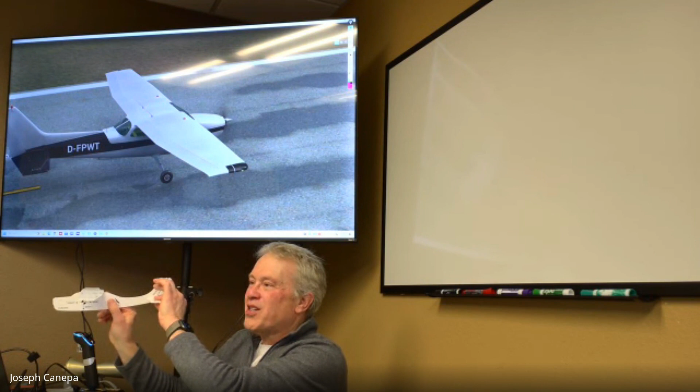What's the control? Elevator - that's what I'm looking for. The elevator is what causes the plane to turn. Remember we talked last week: when the aircraft goes into a bank, it doesn't turn just because you bank it. What causes it to turn is the elevator, which creates lift that pulls the aircraft into the turn. So when anybody asks what causes an aircraft to turn, it's always the elevator. You can also say pitch, since you're pitching into the turn, but most instructors are looking for elevator. Banking alone doesn't cause the airplane to turn - it needs a force to push it into the turn, and that's the pitch or elevator.

Let's see here. Okay, what are these that are slowly dropping down? What are those? Flaps, yep.

Hey team, how you doing?

On some aircraft, the flap actuators can be like an old style brake handle that you pull up one notch at a time. Some older aircraft have a little bar on the floor of the cockpit - you press a button and pull it up like that old style brake. I don't know if you've ever seen an old car, they have a little push button, you lift the lever up and it drops down a flap. I love those, by the way.

But a lot of the newer ones have electric switches in the cockpit. In this case, what I'm doing is holding a button down in the cockpit. Let's switch to that. So in the cockpit, the flap switch is right here - there's the flaps right there. What you do is pull that down, you can see that right there. So right now the flaps are dropping. You can see this right here, that's the flap indicator - it tells you how many degrees of flaps you have. This goes up to 40 degrees of flaps. So you put that little lever down and you can see the indicator in that yellow area. It's showing we've got 40 degrees of flaps. If you want it to go up, you just flip it up like that.

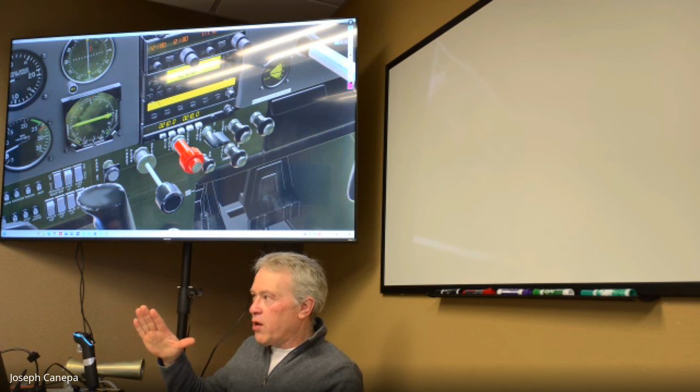These were older style electronic activated flaps. The newer ones actually have detents - a detent for 10 degrees, 20 degrees, 30, and so forth. So it's easier to drop the flap, you don't have to hold it down for a certain amount of seconds to get it there. The problem with those old flap switches is you have to count them out, whereas the newer style flaps, you just set to the position and they automatically round down to that 10, 20, 30, 40 degree position. So that's the flap switch right there. Bring that up and let's see if I go outside there. All right, so there's flaps.

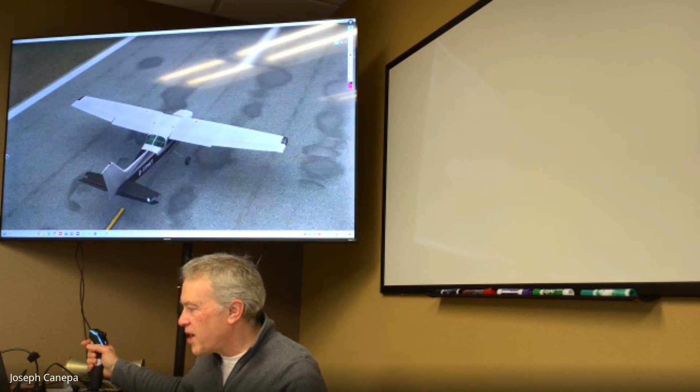And what's this? Elevator, yep. And what does that cause the plane to do? Pitch, yep. So when we pull back on it, it's going to cause the plane - let's move this down here - if I pull back like this, what is the plane going to do? It's going to pitch up and go into a climb, as long as you've got enough airspeed. And then this obviously is pitch down.

Okay, what's this surface right here? Control surface, yeah. What's that? The yaw, yeah, it controls yaw. And what is it called? Rudder, yeah, just like in a boat - same thing, you steer it one direction. This over here.

Let's go right back here. So see if I swing that way, the plane is going to yaw. So here's our plane, if I do a rudder like that, the plane is going to yaw in that direction. Yaw like that. If I do it like this, if I push on my right rudder pedals - now these are controlled by rudder pedals inside the cockpit. Let's take a look at those. I don't know if I've shown that to you before.

Right, so let's look at the rudder control yoke. These are the rudder pedals, and they look like brake pedals on a car, but there's a left one and a right one. When you push on the right one, you can see that pedal move in there. Notice how also on this plane, you've got two sets of them, one in the pilot position and one in the co-pilot position.

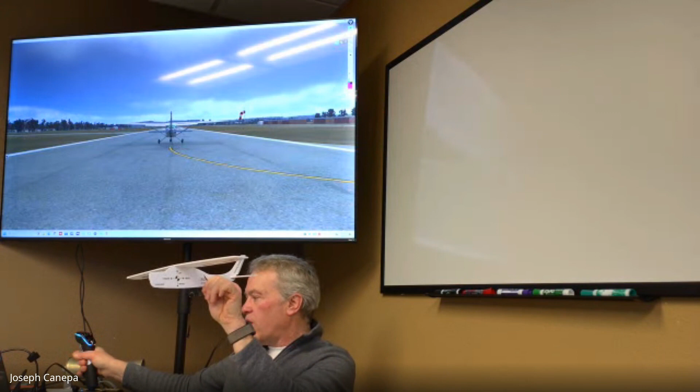So again, if I want to do right rudder, for instance, I'm going to push on that right rudder pedal. And see how the left rudder pedal comes back to do it? They're linked together. Imagine in this aircraft you've got a long cable that runs from the foot pedals up here all the way back to that rudder. It's just a loop that goes through these two rudder pedals. As you apply rudder pressure to the right rudder here, it's going to cause it to do that. So if I go outside the aircraft and hold my right rudder, you can see the rudder swinging to the right here. The other thing you'll notice about the rudder pedal, and this is true of most training aircraft, watch the nose gear.

See how it turns the nose gear right there? It's kind of hard to see this thing. Let's go to the front here. Okay, so there's our nose gear right there. So I'm just going to apply right rudder pressure. See how it turns... I don't know why it's going back and forth, something with the sim there. It's trying to turn right there. It's not staying very well. But that's a linkage from the rudder pedals here to the nose gear.

And that's so you can steer on the ground. Because obviously, when you're on the ground and you want to steer and you don't have any air flowing over your rudder, the plane's just not going to steer at all without some sort of friction on the ground. And that's what that does. There's a linkage again in the cockpit here from the rudder pedals down to this. That same linkage also goes all the way back to the rudder in the back of the plane. So that's rudder controls, and they're basically, in most training aircraft, just cables. That's all it is, cables and pulleys.

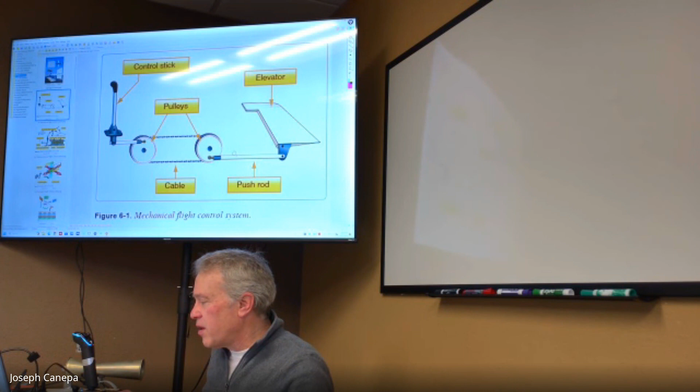And it's usually a series of push rods and cables that connect all that stuff together. So there are what we call pneumatic and hydraulic systems that do essentially the same thing. When you think of hydro, think of fluid. We've all heard the term hydraulic, that's referring to a fluid. What a fluid does is it takes the place of the cable. You're displacing fluid in one piston, like here, with another one over here, so it's actually causing this. If I take out fluid here in this piston, it's going to cause this piston to move over this way or something like that. You don't have to know a lot about this for the test, don't worry about it. The FAA doesn't get into hydraulics or pneumatic systems.

They just want to make sure that you understand how a plane flies, what the control surfaces are that cause it to fly. So, this is a typical system.

Pneumatic systems are controlled by air. You've got liquid, which is hydraulic. Think of hydraulic fluid like in tractors, there's hydraulic fluid even in cars and stuff like that. It's just another way of transferring energy from one part of an aircraft or car to another. Pneumatic does the exact same thing, it's just air pressure instead of fluid.

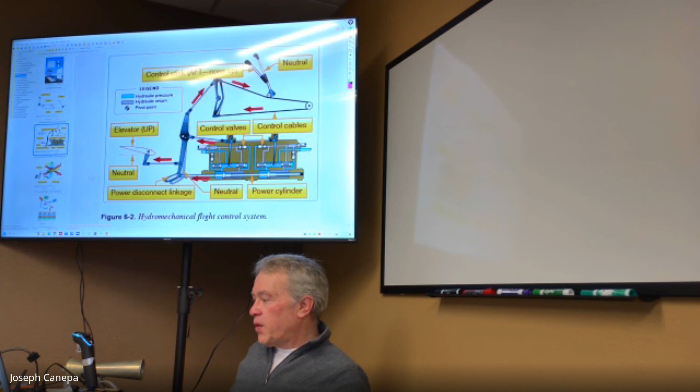They've got a lever called a collective, and that changes essentially the pitch of the blades of the helicopter itself. That causes the helicopter to rise up, as long as you've got enough power. If you don't have enough power, the blades are going to stall.

The cyclic is going to cause the helicopter to bank left or right, or forward and back. And then your rudder pedals, they don't call them rudder pedals on a helicopter, but they do essentially the same thing. They control the yaw of the helicopter, basically by a prop in the back that blows sideways. If this is our helicopter, and you press the right anti-torque pedal, it's going to cause the helicopter to turn that way.

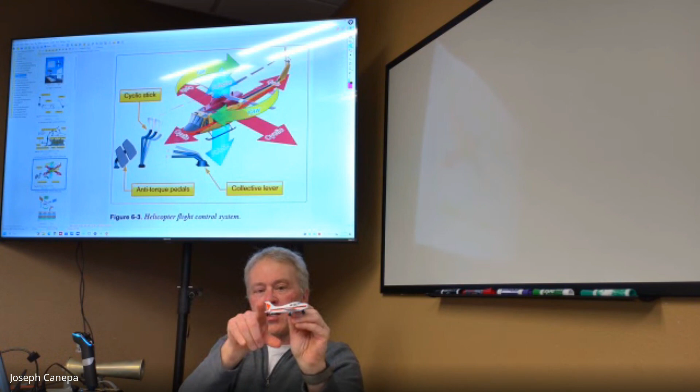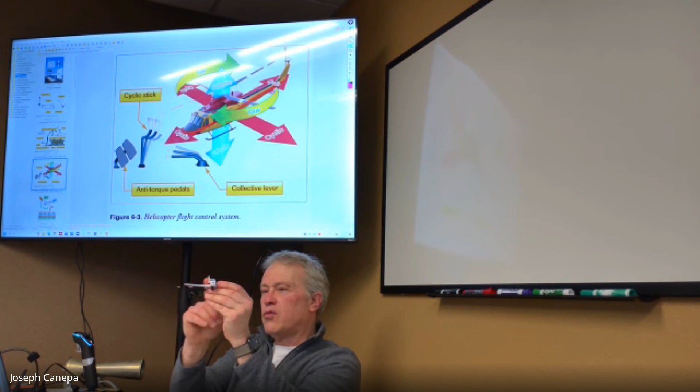That's, you could probably guess, this right here. It spins at a constant rate, but the pitch on that propeller is kind of hard to see there. Just think of this as an aircraft propeller, but it's got a variable pitch on it, so you can actually control the pitch of the propeller.

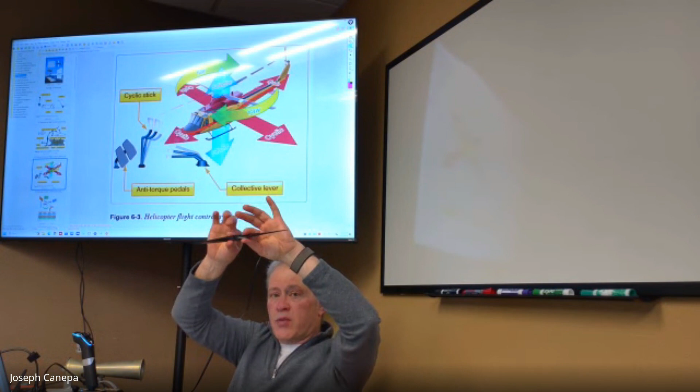This right here is a fixed pitch propeller, the pitch is locked in place, it's just welded right there. On a variable pitch, or constant speed propeller as they call it, these blades can actually twist and turn. There's an actuator in there that causes it, and that's what's happening here, so they can change how much thrust that's producing. That's how they get it to yaw left and right.

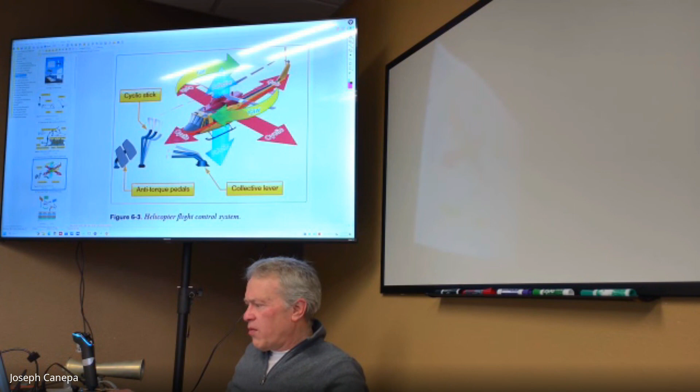Again, I don't want to spend a lot of time on that because the FAA isn't concerned that you know that much about it. So, as we've talked about before, there's different axes of control on an aircraft, and they've got all the answers right here.

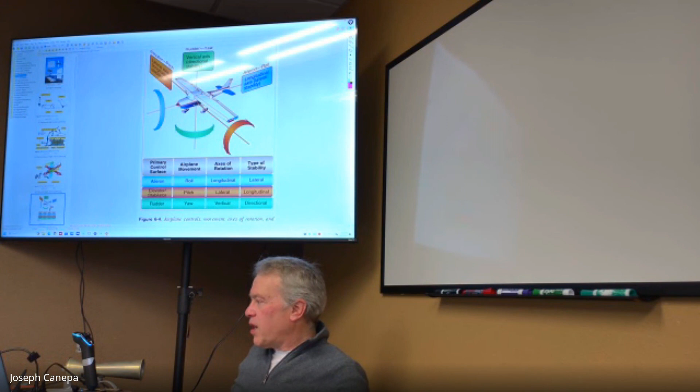So elevator causes the aircraft to pitch, we've already talked about that. And then we've got our vertical axis, yeah they do talk about the axis of rotation there. This is a good chart if you ever need to use it on the short test, that is 6.4.

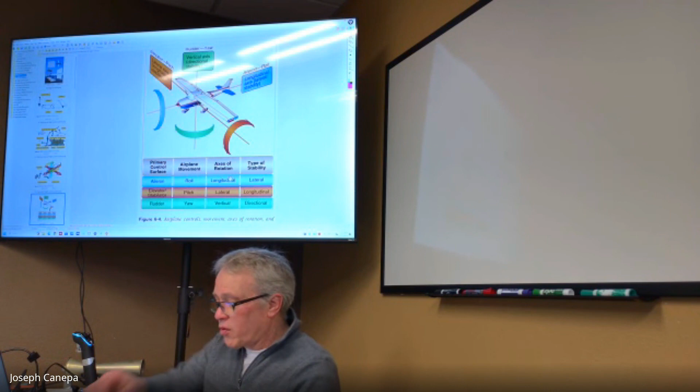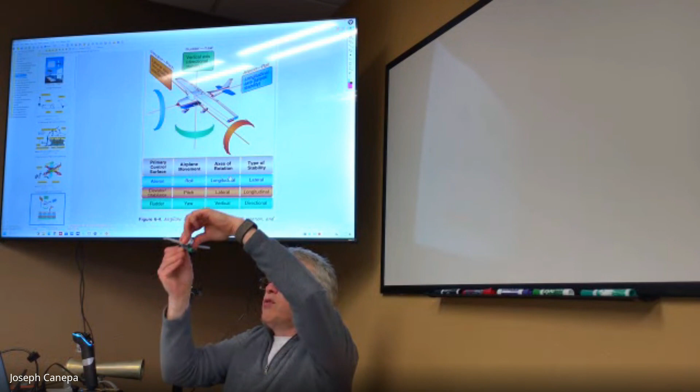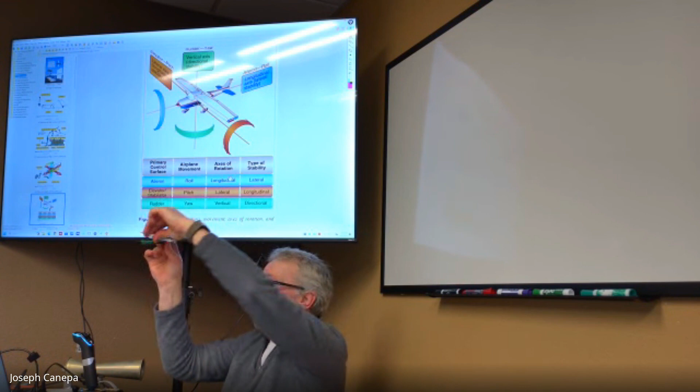You can again just go over this, this is stuff we've already talked about. The aileron causes the plane to roll back and forth, and the axis of rotation for the aileron is longitudinal. The longitudinal axis goes through the tail of the aircraft to the nose of the aircraft, and it rolls around that axis like this.

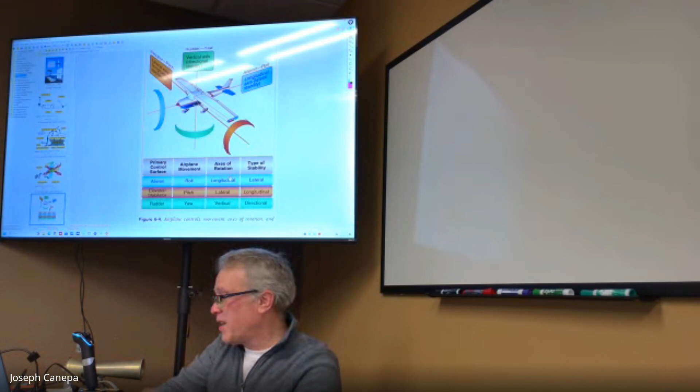Okay, and the lateral axis is this way right here. What is our control for the lateral axis? What causes the elevator and pitch? Yeah, I think you guys got this, but we gotta go over it. And then vertical, obviously, is yaw and directional control there.

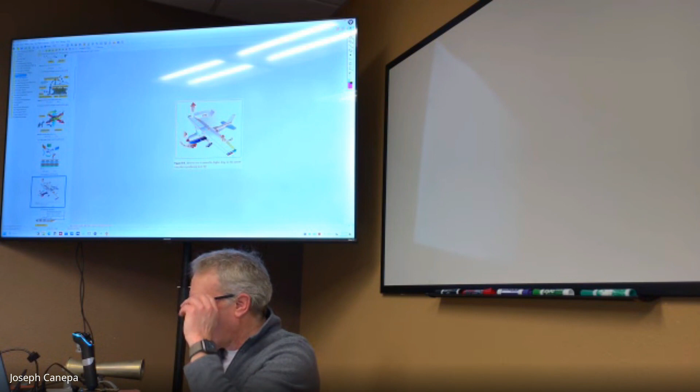All right, so this is a new concept that we haven't talked about much. I think maybe we went through this once, I may have hinted at it one time. When you go into a bank on a turn, there is one thing that I briefly touched on. I said we'd get into it a little bit later. Now is the time we're going to get into it.

So let's say we want to go into a left bank. So you're right here, you want to go into a left bank. So on your side, it's going to go like this, right? What do we have to do inside the aircraft to get it to go into a left bank?

So what's that going to do when we take our control yoke and move it down? What is it going to do to these ailerons? Is this one going to go up? Is this one going to go down, or vice versa? We know that ailerons act opposite to each other, right? So if I want to bank to the right on your side here, these are the controls right here, we go like this. Then same with the left, we're going to go like this.

So in a left turn, I just gave you the answer. What are the ailerons going to do? What is this one going to do right here? It's going to go up. What's this one going to do over here? Down. So because of that, this right here is actually producing a lot of lift.

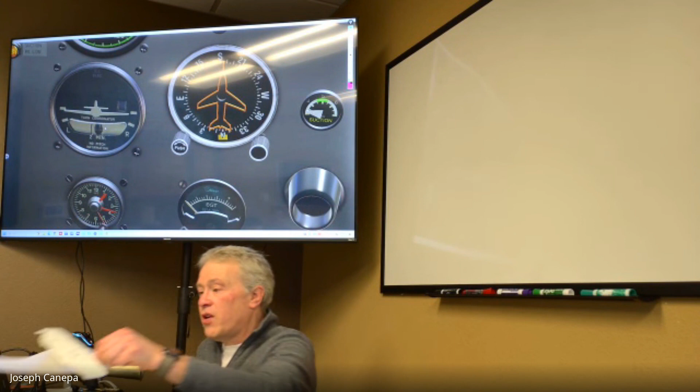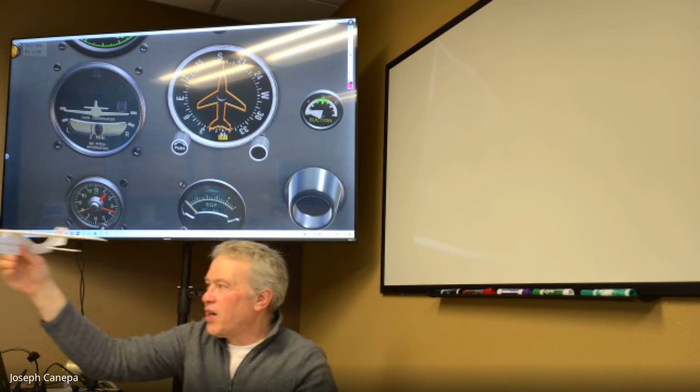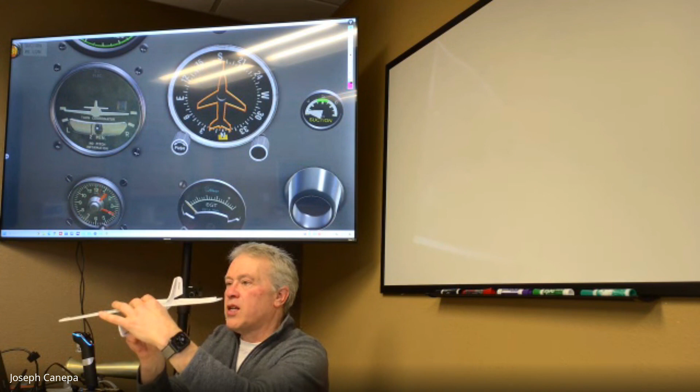It's probably the simplest instrument in the aircraft, but it tells you how good the quality of your turn is. So if we're flying straight and level like this, but we've got our rudder turned like that, and we hold it straight and level, the plane is going to fly through the air like that. What you're going to see is that ball is going to swing to the outside of the turn, way over this way. We want to get that ball in the center between those two lines, and keep that ball inside that turn. That's telling us our center of gravity is right below us, and now we know that we've got a coordinated turn, or coordinated flight.

There may be, if you're doing a long cross-country flight, you'll occasionally see that ball swing over from one side to the other. It usually means that maybe one tank has drained more fuel than the other, so the plane is compensating for it, and you have to adjust. Most aircraft do have a rudder trim or something like that. A lot of the small trainers don't, because they're so light, and they typically drain fuel from both sides. But yeah, that's what that's for. That's part of the turn coordinator.

It's actually called an inclinometer, that's the technical term for it, but it's part of the turn coordinator. There's two instruments in here: this part is the gyro, which tells us our rate of turn, and then this just tells us the quality of the turn.

So, this is good enough to maybe just demo. Let's get it up in the air here. All right, let's see if I can actually fly this thing today. See, it wants to turn left. I'm applying right rudder now to keep it on that center line as best I can. We're in the white arc now.

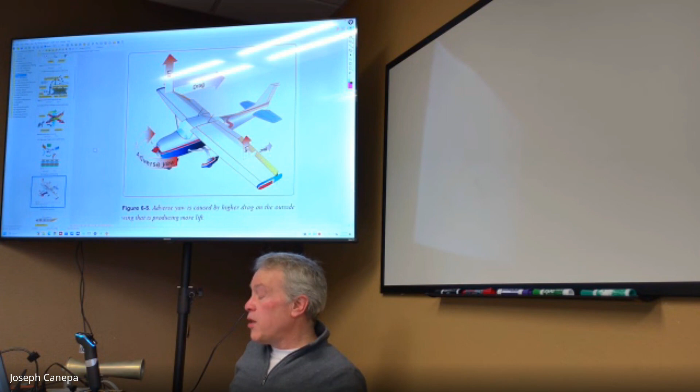All right, that's what this whole diagram is describing here. We're producing lots more lift on this side. Because we're producing more lift, there's more drag. It causes that wing to fall back, whether it's left wing or right wing, just depends on which way we're turning. The plane will always turn in the opposite direction. Again, you will get tested on that - there's questions on it.

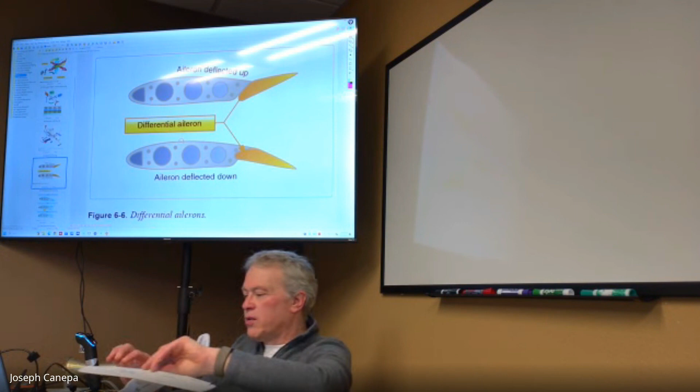So, ailerons here, we've already discussed this. We really don't have to go into it, I think you guys have got this down. So the ailerons work opposite of each other - when one goes up, the other one goes down, vice versa.

Now, one thing you can do if you want to impress your instructor when you go to check your controls: take your hand, put it on your control yoke, stick your thumb up, okay, and then turn the control yoke. The direction that your thumb is pointing in is the up elevator or the up aileron. It should point to the elevator or aileron that's up.

It's not enough just to check and see that the controls are free and correct. You guys haven't gotten into this yet unless you've gotten into flight instruction. But one of the things your instructor is going to expect during preflight is to make sure the controls are free and correct. Two terms there: free - I can move my elevator back and forth without it binding up someplace. Every now and then it does happen, very, very rare, but maybe a stone or a stake gets stuck in the pulleys, and all of a sudden you can't pull the elevator all the way back. That would be disaster in flight, right? You have to have control of the aircraft, control yoke.

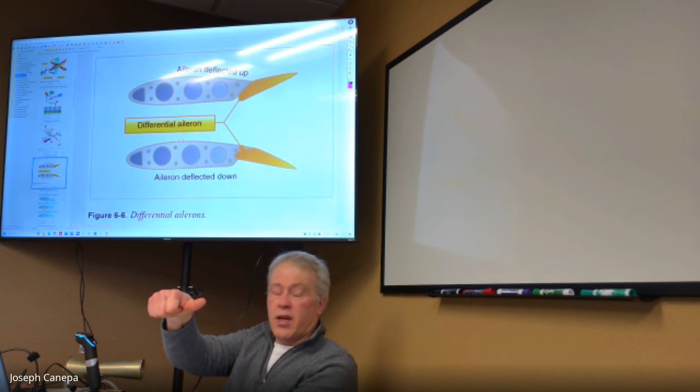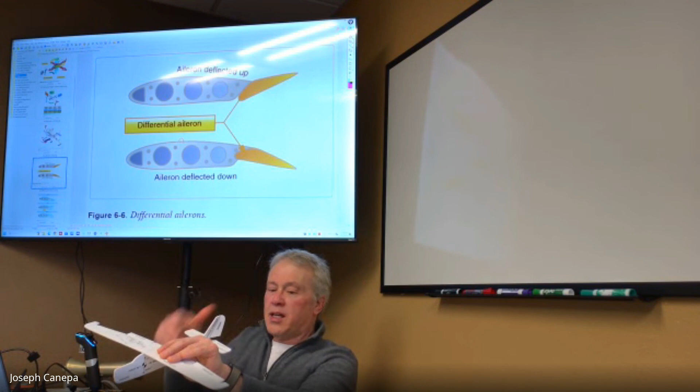So if you have your thumb up, either right or left, and you rotate your control yoke this way, you should be looking at the aileron that's lifted up. It should be like this - if I take my control yoke and swing it over like this, this aileron should be up. And then I should look at my opposite aileron and make sure that it is down. That's the correct part of it. So it's free - the control is free both ways - and correct.

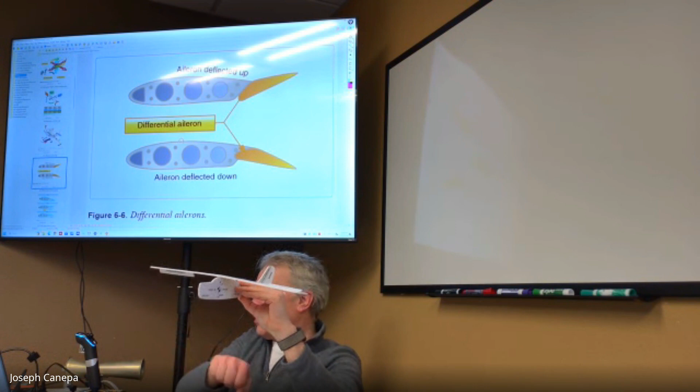The ailerons are up and down on both of those. We do the same thing with the elevator and check that. If you've got a rear window on the aircraft, you can look out just to make sure that the elevator is working right.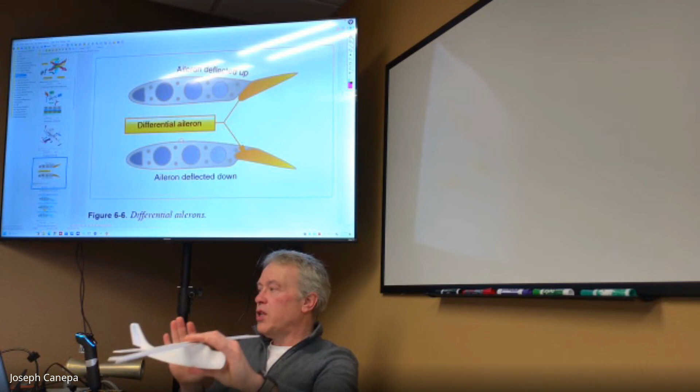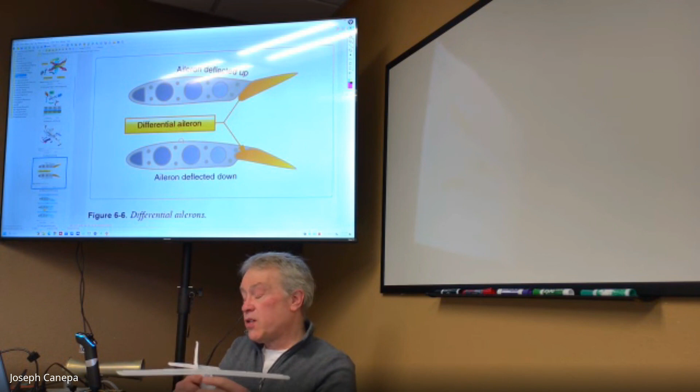Same thing with the rudder. We run the full motion of the rudder to make sure it's completely free, and that the cables are completely free. It's a little harder with the rudder because it's tied to your nose wheel, and there's some friction there when you apply full rudder, especially if you've got a heavy aircraft. It's going to be a little more difficult to do. So, any questions on that?

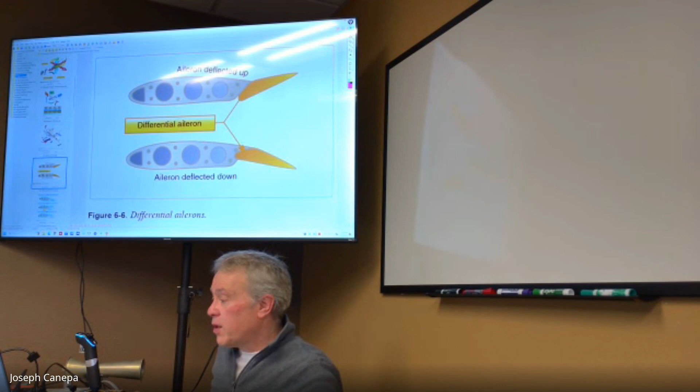And these are the typical ailerons you're going to see, and what they're really describing here is how the air flows through this. A lot of the Cessnas and Pipers have a large gap. This is a cross section of the wing, and this is our aileron. You can see as the aileron lifts up, the rear lifts up and the air flows through there. That helps it produce a little more lift, negative lift in one direction or positive lift in the other. So it's positive lift here, pushing that up, and this one is producing lift in the opposite direction, or creating drag.

So it assists in the turning of the aircraft and the banking of the aircraft.

Again, nothing unusual here, guys. You know all this stuff with the rudder deflections. There's a typical diagram for the control yoke and the linkages. Oftentimes you'll see springs in there, and you don't have to worry about this stuff. You don't have to know about this, at least as a private pilot. You don't have to know how it connects. You just need to know that the control yoke controls ailerons and elevator, and the rudder pedals control the rudder itself.

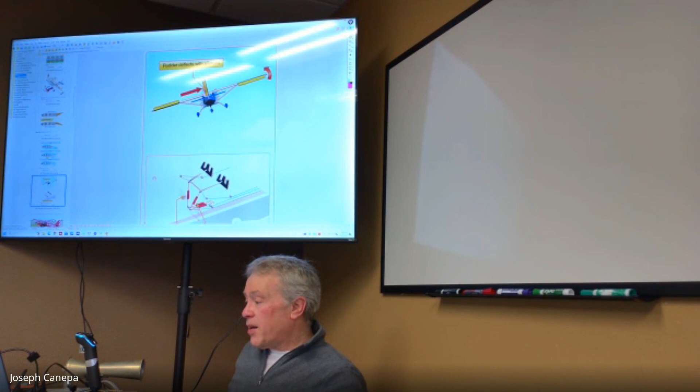This is kind of interesting. This is an aircraft that uses what we call flaperons, and flaperons, like the name sounds, are a combination of flaps and ailerons. So it doesn't have two distinct controls for those surfaces.

Let's go back to our plane here. On this aircraft, kind of hard to see, let me see if I can drop it. So this is a flap right here, and this is a flap. We know they're linked and drop down together. It's kind of hard to see, but this is the aileron. Let me drop the flaps a little bit so you can see the distinction. Let's pause it right here. So there's our flaps, they both come down at the same time, and there's our ailerons, one right and left.

With flaperons, this is one solid surface, and what they do is combine the flap control with the aileron control, so these control surfaces do kind of the same thing. If these are the flaperons in the back of the aircraft, let's say this is our aircraft, and if you drop flaps, the whole flaperon moves down a little bit, but you can still control the bank of the aircraft with the ailerons. So it's a combination of flaps and ailerons, that's what a flaperon is called.

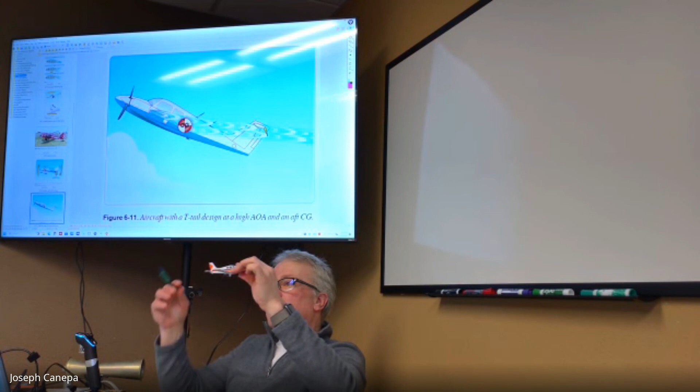Okay, so this right here is what they call a T-tail aircraft. Most aircraft have the elevator in line with basically the wings, really close to the wings like this, almost in line. But on the T-tail, the elevator is actually on the top of the aircraft. So instead of it being down here, on a T-tail the elevator is up here. The horizontal stabilizer is going to be up here instead of down here.

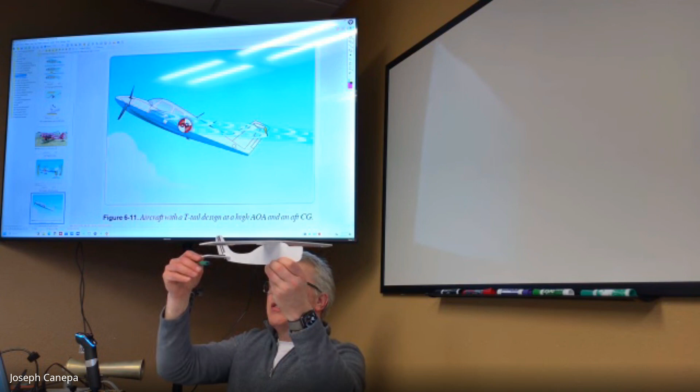It does have slightly different characteristics. The whole idea behind a T-tail aircraft is that they're a little more controllable sometimes in certain situations, a little less drag there. But it can also create problems with stalls, because when you get close to really slow speeds, there can be some issues with that. Again, I don't think there's anything on the FAA test on that, just know that a T-tail aircraft is going to have the elevator up here as opposed to down here. As you can see, there's no horizontal stabilizing surface down here, it's all up there. I think they go into that a bit in the book, just take a look at that.

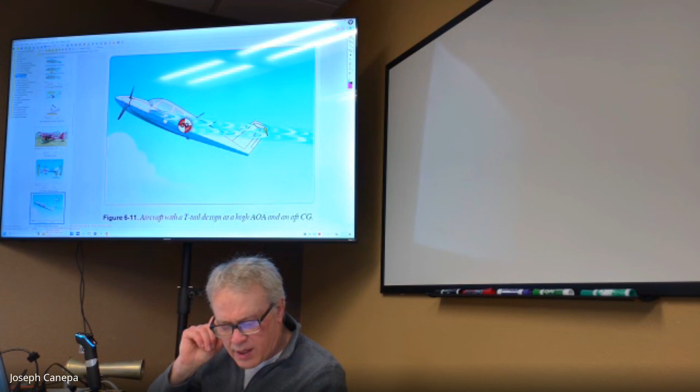Yeah, this would be on 6.6, I believe, they talked about it there. You'll see this in like, what is it, I think Piper Arrows have T-tails, but there's not a lot of aircraft that have it. Some of the faster jets, you'll see the T-tail, like I think there's another one on page 6.7. Yeah, Citation, I think, has the horizontal stabilizer on top, and I think there's a lot of other jets that do as well. They do that mostly for performance, but there are some side effects of it. So that describes a T-tail there.

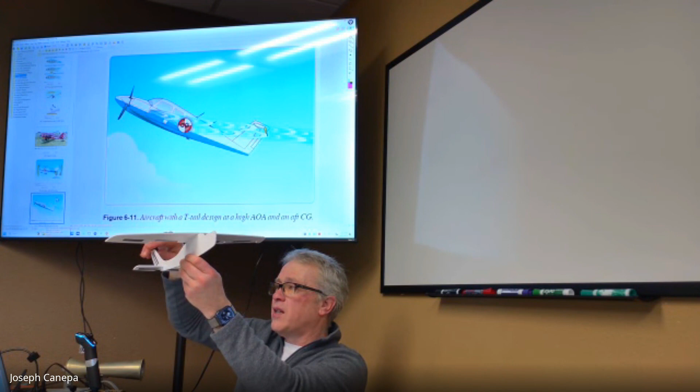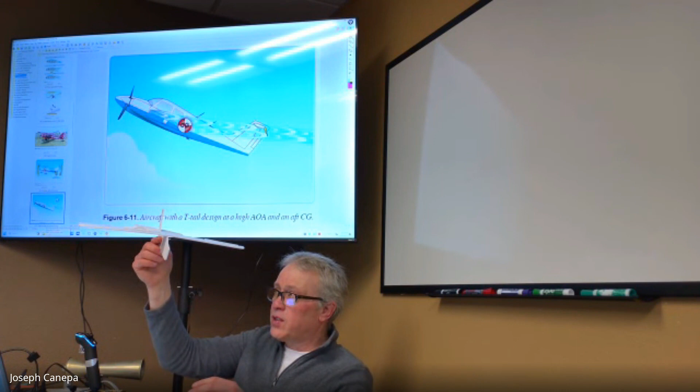I guess the big thing here is they're saying when flying at a very high angle of attack, if the plane is flying at a real high angle of attack, because the air is hitting this wing, it's creating little eddies. We know when the aircraft is approaching a stall, the wing isn't producing sufficient lift. You get a lot of turbulence back here, a lot of burbles of air. What happens is it doesn't hit that surface and it becomes a little less stable. They describe it in the book: flying at a very high angle of attack with a low airspeed and an aft CG, that T-tail aircraft may be more susceptible to a deep stall. That's meaning the airplane is going to stay in that stall for a long period of time.

So again, that's one of the things, and again I don't think that's on the test, but it's something you should be aware of there.

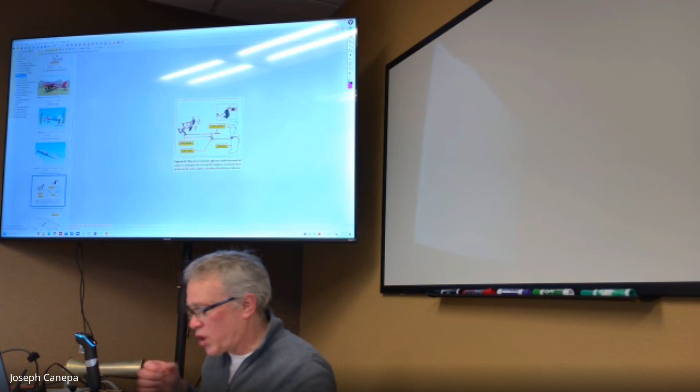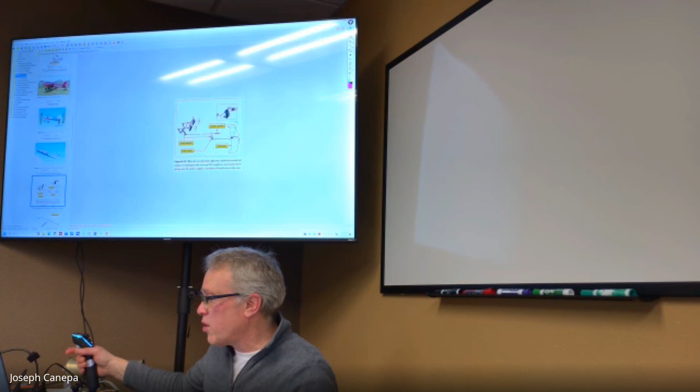Okay, let's see, let's go here. You guys know all this stuff already. The controls, elevator, you know what controls the elevators, the yoke, pushing it back and forth. I do the same thing on the control yoke. If I push the control or the stick forward, and some aircraft have sticks, the plane is going to move down. Same thing, so they work the same way. A stick and a control yoke is going to work essentially the same.

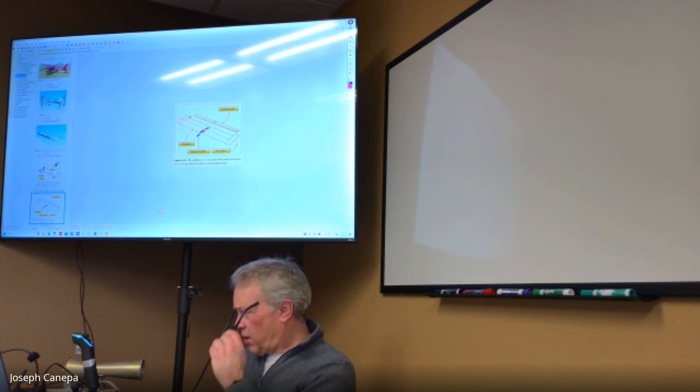All right, this is something you'll see in a lot of Piper aircraft. They have what's called an anti-servo tab.

Can anybody guess what that is? This is the stabilator, we call it, and it's in the back of the aircraft. Can anybody guess what this does? This anti-servo tab, it's more like a trim tab, it kind of corrects.

Actually, you're right, it's a trim tab. That's what it is essentially. I don't know why they call it an anti-servo tab, but it's designed to adjust the trim of the aircraft. So it runs pretty much the full length. If you ever see a Piper, just take a look at the tail and you'll notice that the trim tab runs the full length of that.

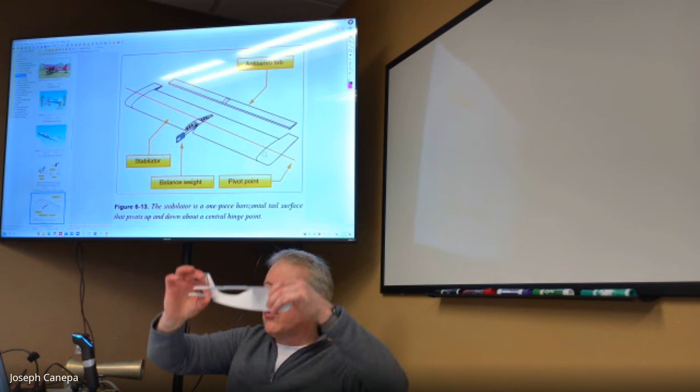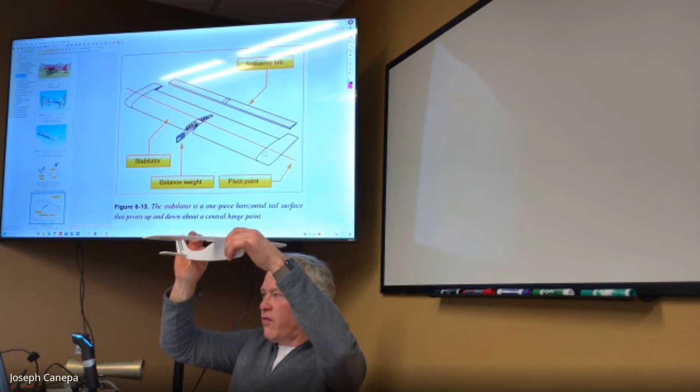I think it has something to do with the fact that this is a stabilator, and that's why they call it an anti-servo tab. But essentially, you've got your pivot point right here. This red line right here is our pivot point. And as I pull back on the control yoke, the whole assembly is going to bend into the wing like this. This whole surface is going to bend, not just the elevator itself. That's called a stabilator. When it's all one piece like that, we call it a stabilator. And again, you'll see it in a lot of Piper aircraft. Most of the Cessna aircraft have fixed horizontal stabilizers, and then the elevator itself.

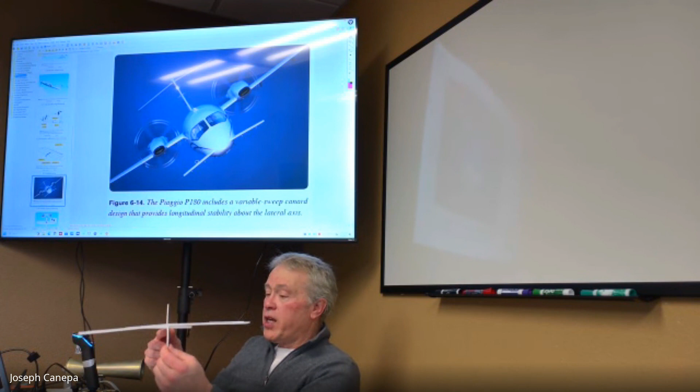But what they do is they help prevent you from getting into a stall, because they're so small, that's what controls the pitch of the aircraft. The canard does, that's your elevator right there. With that small of a wing, they don't have much authority if they don't have a lot of air flowing over them. So if there's not much air flowing over it, the aircraft has a natural tendency to just pitch down. So they're really difficult to stall. And that's, again, kind of a safety design.

It's also a performance improvement in the aircraft, believe it or not. Those planes go very fast with very small engines. You can find planes like that, maybe 120, 140 horsepower engine, pushing almost 200 miles an hour. They're very sleek, composite construction. I think one was the Easy Cozy. Bearcat was another one. But there were a lot of aircraft made with that type of design. And again, that's called a canard when you've got the little wings in the front. That's what controls the pitch on the aircraft.

Okay, any questions?

Great, and you already know about the rudder pedals, you guys are comfortable with that. Left rudder, you can see our rudder is going to bank over this side here. And actually, looking at it from here, this looks suspiciously like, if I zoom in just on this area right here, look at this, that looks like a cross section of a wing right there, and that looks like an aileron, doesn't it? See what's happening there?

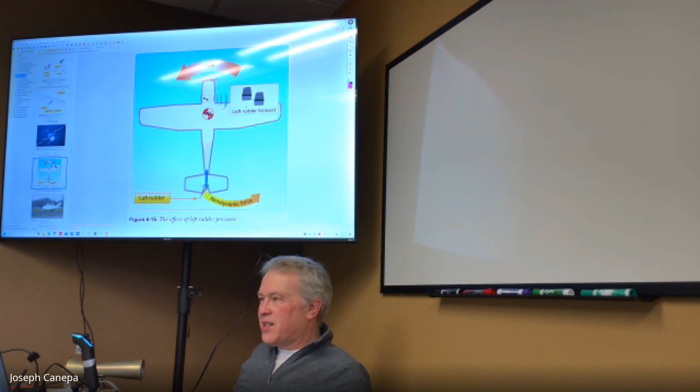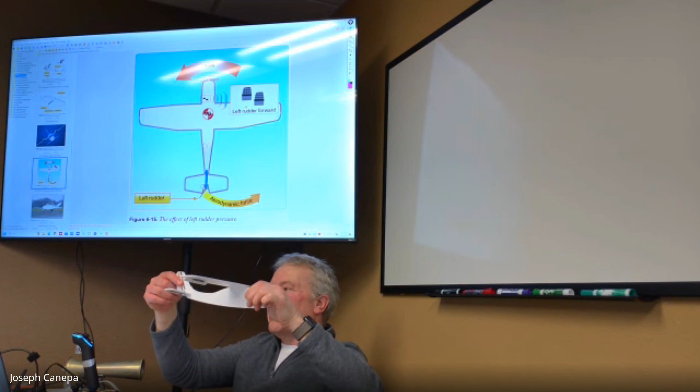It's using the same thing, the same dynamic forces, but instead of doing pitching like banking left and right, this is pushing. It's creating lift. In this case, it's producing drag on this side and lift on this side, so it's causing the aircraft to yaw to the left. It's the same as what it is on the aileron. If we look at an aileron here, when this goes down, that wing is going to rise, right? Well, it's the same thing with the rudder. It uses the same type of thing, except that it's mounted in a different axis. That's how we control the aircraft. So, anyway, just want to point that out.

So this is kind of a unique aircraft. This is a Bonanza V35. And you'll notice that it doesn't have a horizontal or vertical stabilizer or control surface. It has two of these V-shaped things. What they've done here is combine the rudder and the elevator into two of these surfaces.

There's a thing like that when we were leaving yesterday, or last week. It was probably a V35. And also at that, the engine was on top. Oh, a Vision Jet? Yeah, I was at this airport. Do they have a canted tail? Yeah, the tail surfaces do rise up on the Vision Jet, but it's not as extreme as this. This one, I think they started making these back in the 50s. They call them V-tail.

Is there a third wheel in the front there? Yeah, you can't see it. It's behind the main wheel right there, but there's a wheel right there. Yeah, I was confused. That's not it, is there? So yeah, it's buried in there.

So what advantage do you think a design like this would have? Anybody want to take a guess? Probably pretty smooth, less drag. Less drag, yeah, definitely. Here's a tail from a regular aircraft right there. You've got all these control surfaces out here, the horizontal stabilizer, vertical stabilizer. That's 3 surfaces. This now has just 2 surfaces. So you're producing less drag, so the aircraft performs a little better, and that was one of their selling points. They said the aircraft flies faster because there's not as much drag.

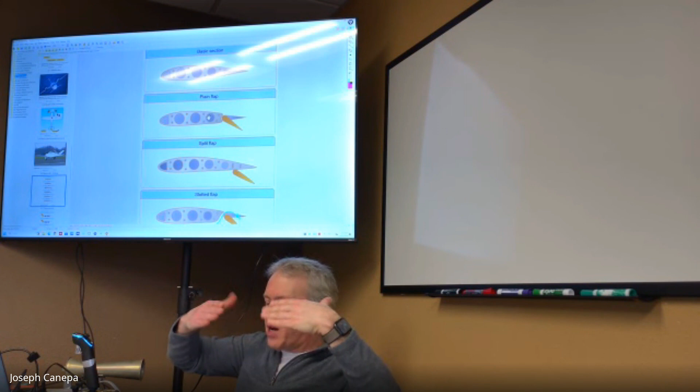Now, there's different types of flaps. This is what is known as a plain flap, and all it does is rotate, pivot up and down like this. There are split flaps, which actually come out from within a cavity in the wing itself. That's called a split flap. They produce a tremendous amount of drag because you still have that upper surface there, but you also have this flap coming down, and because of that, let me draw this here.

So as the air flows over this here, it hits this, and it starts creating turbulence there. The air hits this down here, and it produces lots of turbulence right here. Whereas in this flap, the air flows across and down like that. This gap isn't there because this whole thing is moved down in this position. So that's the advantage of a split flap, and why we want to produce lots of drag on the aircraft. Let's see here.

Most aircraft have what's called a slotted flap, or Fowler flap. These are the most common flaps you're going to see. In the slotted flap, air pulls over the wing like normal on top, but on the bottom it flows through a little channel and then down. So they produce a lot more lift and drag simultaneously.

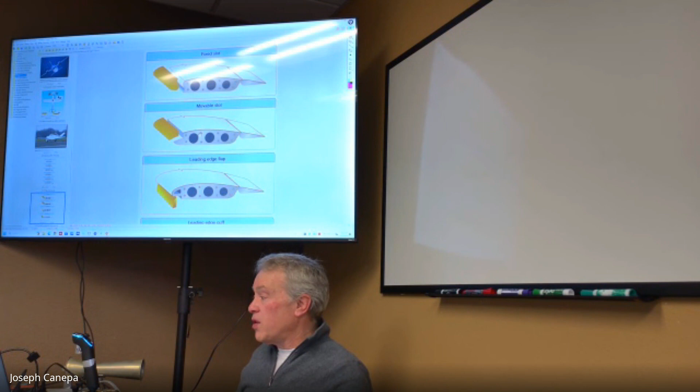When we come into land, especially with an airliner designed to travel really fast, you want to get it as slow as possible to come into land. So they're deploying all these different devices to get the aircraft to slow down to a speed they can actually land it. Because at altitude they're flying 400, 500, sometimes even 600 miles an hour, and when they get to the ground they can't land at that speed, so they have to configure the aircraft to safely land using these different control surfaces.

So this is a leading edge flap. This is going to produce a lot of drag right there, and it's going to produce some lift as well. Again, leading edge slat or cuff, they call it here. We'll see many of those.

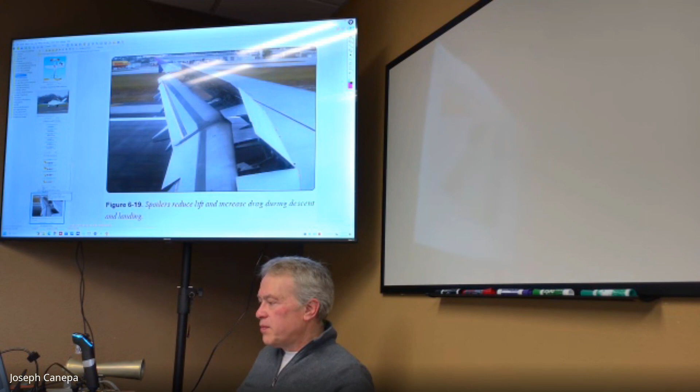And does everybody know what a trim tab does? Have we talked about that yet? Okay.

It'd be nice if we could actually go out with real aircraft because I could show you what a trim tab does. It's hard to describe. Okay, so Jace, you're flying a 172, maybe you can help us out with this. So when you take off in the plane, are you constantly holding onto the elevator to keep it at the pitch attitude you want? No. Okay, what do you do to compensate? Is there something in the cockpit you use to adjust the pressures on the control unit? Yeah, so if you're trying to go into a climb and you're having to pull back on the yoke, there's a little wheel down here that you adjust, which is your trim unit. Okay, so if you're pulling back on the yoke, you move the wheel back, and that moves a little wing on the back. It just takes out the pressure on the yoke. Perfect, that's what I was looking for, thank you.

So what Jace is talking about is that when we fly, the aircraft is producing various amounts of lift and drag during flight. If we want to fly straight and level without an autopilot, we adjust the trim tab on the aircraft. The trim tab is a small little wing, like this right here, it's part of the elevator. This right here is the elevator, and there's a small chunk of it that can turn in the opposite direction. What Jace is talking about is he's got a control wheel in the cockpit that adjusts the upward or downward direction of this little device. That takes off some of the pressure on the control yoke, and you actually feel it in the aircraft. So let's say I'm flying straight and level and the plane wants to climb—I don't want to fly my entire flight holding pressure on that control wheel. I want to fly hands off. You should be able to fly an entire flight if you wanted to, from after takeoff to just before landing, with just trim and rudders. But to do that, you have to control those pressures. What Jace is doing is adjusting it with that control wheel, which moves this up and down.

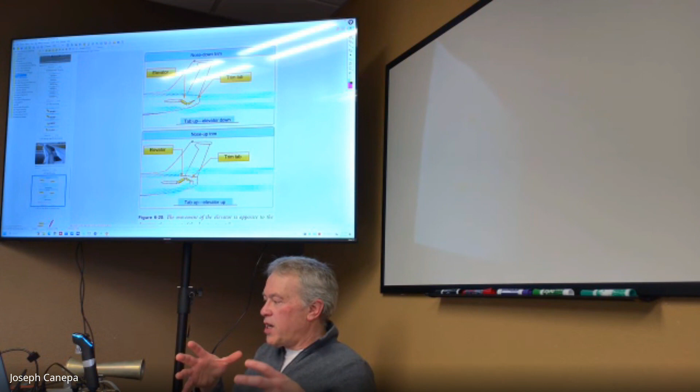Perfect. Okay, so that's what it's doing in the control yoke. It's taking off those pressures so that you don't constantly have to have your hands on the control yoke. It's just adjusting it there.

Anti-servo tab does the exact same thing. It's a trim tab, basically the same thing as a trim tab on a regular aircraft.

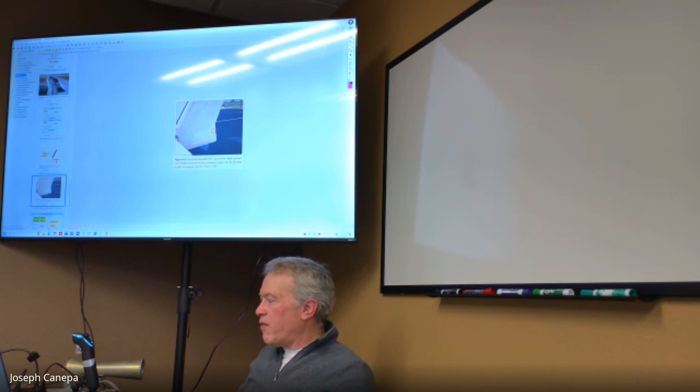If you look on aircraft, a lot of them will have these bendable tabs. It's kind of hard to see, but this little piece of metal right here, you can actually walk up to it and bend it. You never want to touch it without a mechanic, okay? But you can actually adjust the trim of the aircraft with just this, by hand.

You can use pliers with special grips on them and actually bend it, or bend it with your hands. That will retrim your aircraft. So you've got to be careful with it. You don't want to bend that piece of metal.

And that's for fine tuning. This, in this case, is on the rudder, which can be trimmed as well. There, you're adjusting the normal flight characteristics. Again, what it's doing is producing just a little bit of lift in one direction or another to get the aircraft to fly a little bit straighter for you.

Okay, all right, and let's see. Adjustable stabilizer—we see this in higher performance aircraft, like an airliner, where you can adjust the horizontal stabilizer.

So the difference here is that this is more used for trimming larger jet transports and stuff like that. The pilot doesn't control this with the yoke. They have a control in the cockpit, much like a trim wheel in a smaller plane, and it adjusts this whole surface, so that you don't necessarily have to have a trim tab here. Sometimes they have a trim tab as well, but that's how that works.

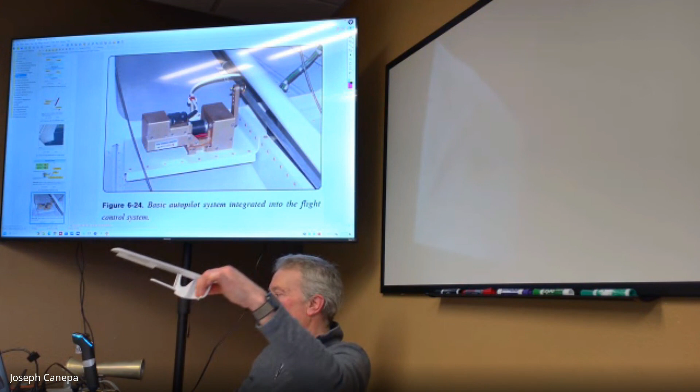So if this moves back to here, it's probably pushing the elevator up like this. And if this moves in this direction, it's probably going to move that elevator down. And there's just a little motor in here.

This obviously is a connection to the autopilot in the plane, but you'll see these boxes all throughout the aircraft. Most small aircraft—a lot of aircraft don't have any autopilots, especially training aircraft. I know a lot of cargo aircraft don't have autopilots on there either. So this is something you'll see in aircraft that do have them.

They'll have at least one. They call them axes. So you'll hear pilots say, 'Oh yeah, I've got a 3-axis autopilot,' and really what they're saying is they've got 3 servos in the aircraft that control either the roll, the pitch, or the yaw. In some cases, they control other parts of the aircraft, like yaw damping and stuff like that—they'll have an axis for that as well.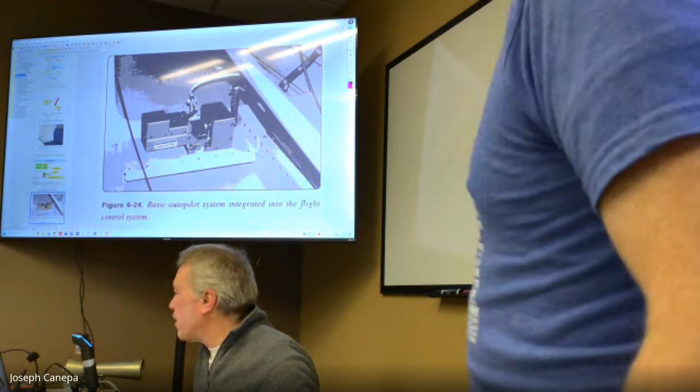You betcha. All right. Get this stuff cleared off for you. Okay, I'll look at the main drone and stuff too. How's it right up? Easy. It's a nice day to be out. Yeah, so.

Thanks, Skip. Yeah, of course, my pleasure. All right. Here. Oh. And it's like a bulk. Yeah, should be the only thing on. Okay.

You good? I think so. Right, so does that look all right? Well, let me see. Yes, but everything else. I don't know, I can plug in my laptop or. Okay, it's up to you. Yeah, maybe let's try that. I don't know, we got time. Yeah, I don't know.

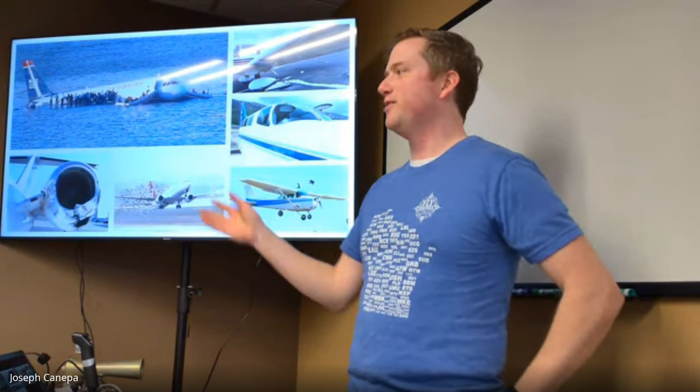Unfortunately, most of the animals that get hit are birds, and birds can actually be fairly difficult to manage. Let's say you get raptors or something. Birds of prey are one of the common things that like to hang out around airports because it's a wide open space and they can see rabbits and mice running around, so it's easy targets for them. But by reducing the amount of places they can perch, or mowing the grass so the rabbits don't have as easy a place to hide, maybe they can reduce the food source on the airport and attract fewer birds of prey.

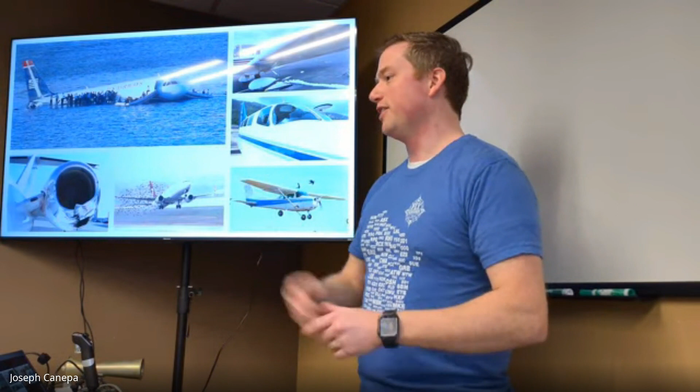Airports also have folks that trap animals and try to relocate them, or if need be, lethally remove them from the airport. As part of that process, it's really important to help try and identify what animal was hit. And for birds, that can be pretty difficult. A lot of times you can find, hopefully, some feathers that you can then send to the Smithsonian, and they will actually identify the bird if you send some of the remains to them.

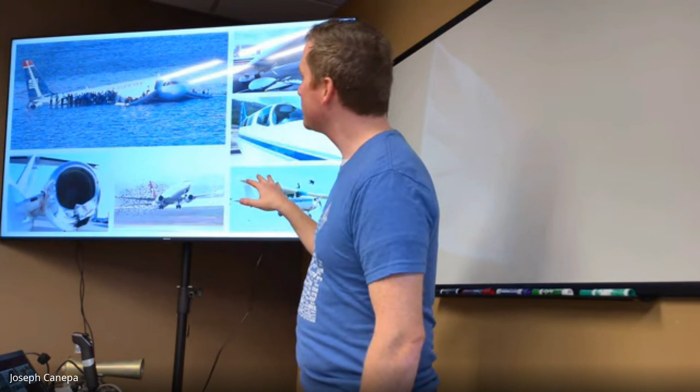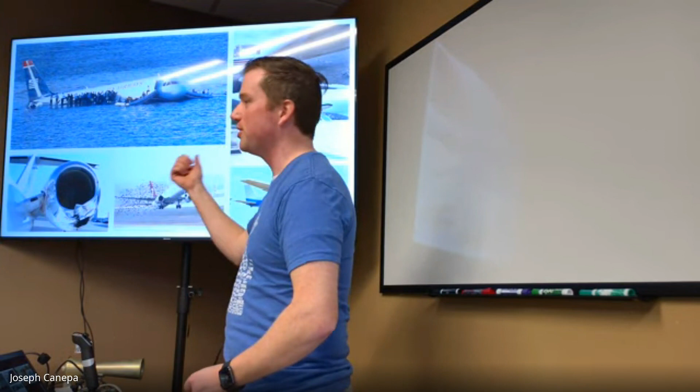You guys learned FOD. I'll teach you another vocabulary word, which is snarge. Snarge is what we call the remains of birds after they've impacted an airplane. I tried to pick pictures of bird strikes that had very little snarge on them, but if you Google wildlife strike or bird strike, you're going to find some pretty gruesome photos. Obviously, the famous one is the U.S. Airways flight that landed on the Hudson River after hitting some birds.

Also as airport ops, a couple other responsibilities. Like I mentioned, you might mow in the summer, you might remove snow in the winter, but at a large airport, most likely you're directing these people where they need to go mow or remove snow. You might not know that at an airport with airline service, they're actually measuring how slippery the runway is so they can report that kind of information.

When I was in airport ops, we had a specific device in the vehicle and we would slam on the brakes at 30 miles an hour, nine times down the runway - three times at touchdown, three times at midpoint, and three times at the other end of the runway - and it would tell us what the coefficient of friction was. Now, a lot more airports have these continuous friction measuring devices that they just pull behind the vehicle, or sometimes they're incorporated into the vehicle itself. But anyways, that kind of information is super helpful to pilots.

Before you land at an airport, you'd like to know if you should expect snow and ice on the runway, because that might change how you plan to brake. At large airports, you're probably going to help respond to emergencies. You might be in charge of the overall response, or at some airports you might be trained as an actual firefighter yourself. I think Dubuque does that, and some of the smaller airports that still have airline service do that.

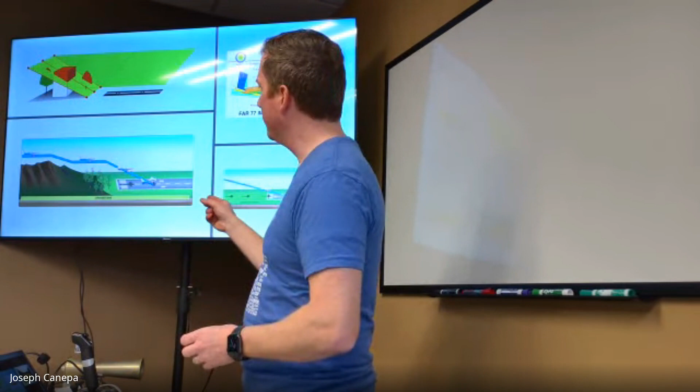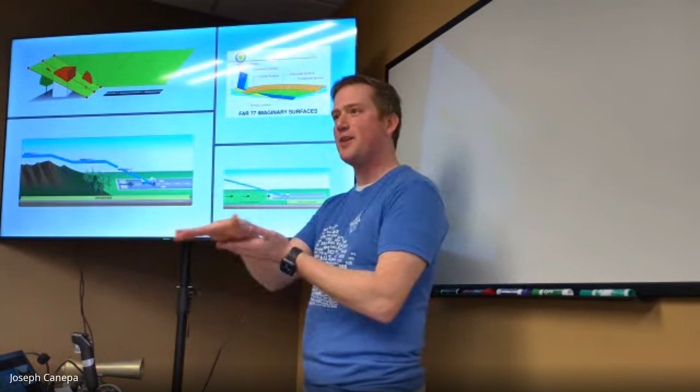Pilots need a similar margin of error for what they're doing, and so there are safety buffers all over the airport. In particular, the approach surface is an imaginary slope off the end of the runway that we try and clear so pilots can make more shallow, stable approaches. They don't have to be like Luke Skywalker diving through the trench of the Death Star to get to the runway. As anybody who has done any flying knows, you want a nice, stable approach into the runway — that's going to be the safest. So by looking at these surfaces, we try to give pilots a better margin of error.

The traditional method of identifying... well, actually, I want to show you first. So when I'm at an airport, I did bring some tools.

The traditional method of using the rangefinder and the iPad is really easy, a really good way to quickly identify if there is a problem, but it does have some limitations. One being I'm on the ground, so I'm limited by my line of sight.

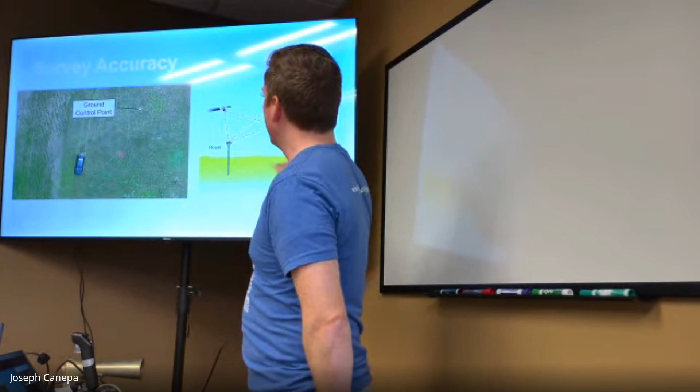The two of them talk to each other. RTK stands for real-time kinematics, and I'm not a surveyor, so I don't really know exactly what that means, other than somehow this setup where you have one rover and one stationary GPS unit that are both talking to the satellites and talking to each other, and correct for common GPS errors and give you sub-centimeter accuracy versus that plus or minus 15.

So anyways, once I'm back in the office, I take all the photos, put them on the computer and run them through a program called SiteScan. There's a few different similar programs out there, but what it does is just stitches all those images together into both a 2D and a 3D model.

Generally, we tell an airport anything within 10 feet should probably be removed. Otherwise, because if you remove just the obstructions, trees grow, and so every year you're going to be back doing the same thing over and over again. So you might as well do everything within 10 feet, and then hopefully give yourself maybe 10 years before you have to come back. So these are pretty extreme examples, especially cable.

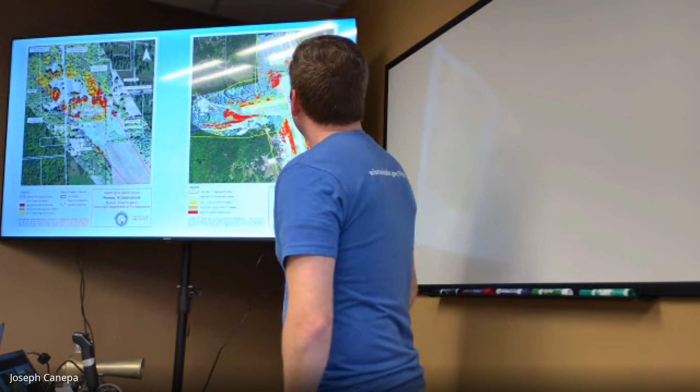So this has some pretty obvious benefits over just my shaky hand laser rangefinder. Accuracy is improved. It's a much more comprehensive survey. I can look at the entire approach area versus just what I can see from the ground. And then we can make these cool and helpful maps as well.

So yeah, since 2021, when we bought the drone, I've flown it at 71 different missions on 35 different airports. And then due to the capabilities of the drone, we're actually looking at using it for a few other things on the airport as well.

One in particular is airport pavement inspections. There's so much development going into using AI to automatically analyze pavement, kind of the same data we've been looking at. If you fly over the entire runway and get a picture of it from above, you can have AI identify where all the cracks are, versus somebody driving down in a golf cart and doing it on a little map, which is traditionally how it's been done. That's a much faster and more precise way to look at pavement conditions.

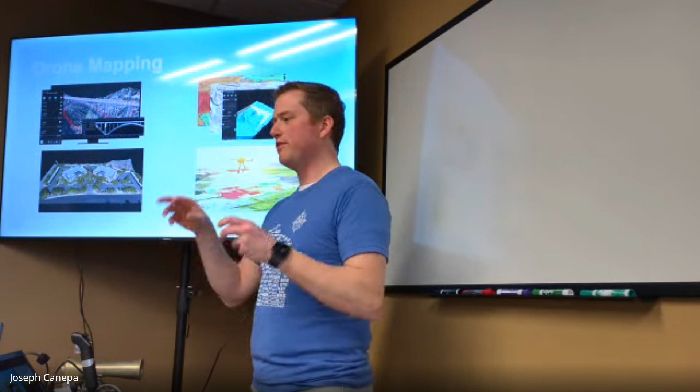Volumetric measurements, for example, are super helpful. Think of a quarry or a landfill, where you could survey it, have trucks come in and remove material or dump trash, and then survey it again, and you can actually measure the difference in volume. Something that would be almost impossible to do by hand any other way. I think they usually use weight, but using drone technology, you could actually do some pretty cool volumetric analysis.

Agriculture is another emerging use application for drones. Imagine how useful it would be for a farmer to have regularly updated scans of their entire fields. They can see where crops might not be growing well - maybe it's too wet, too dry. Using this, they could then pinpoint exactly where they need to water more or spray pesticides, rather than spraying the entire field. They can do much more precise treatments, and then refly it or whatever.

So for anyone interested in a career flying drones, in addition to manned aircraft, or separate from manned aircraft, definitely check out drone mapping. I know there are programs in the state at colleges where you can get a degree in being a drone operator, and I know they focus on mapping as well. Anyways, hopefully that wasn't too long, but happy to answer any questions.